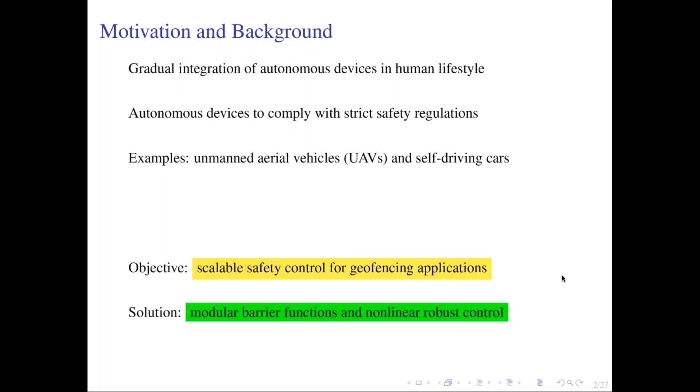So the geofence basically represents a virtual net, a set of distinct points. We have a set of distinct points, and we want to maintain the movement of the vehicle inside the given set. And this becomes our operational environment.

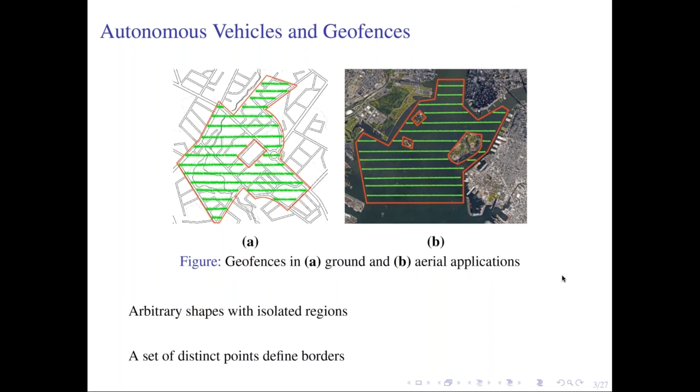So regarding the state of the art in safety design, there have been many different methodologies, especially for UAVs, because we are dealing with an intrinsically unstable system. Also, the UAVs are underactuated, so creating a safe trajectory is not an easy task. For example, you cannot just use the position or velocity information to maintain the vehicle inside the geofence - that becomes a tedious task. That's why many people have opted to enforce safety regulation at the control level.

Popular methods that have been around since the 1970s, early 70s, include, for example, barrier functions, which is a rather recent methodology, potential fields, and dynamic programming methodologies. For example, you have MPC, model predictive control, quadratic programming, and nonlinear programming.

This all falls into this category, including dynamic programming. And another domain is basically machine learning, including artificial intelligence and other computationally intensive methodologies.

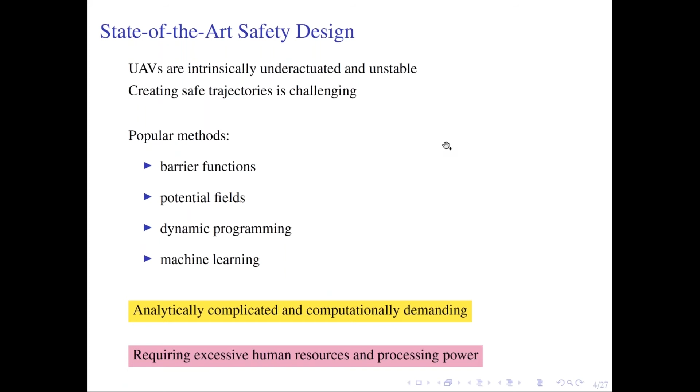So what are the issues with these methodologies? One is that they are analytically complicated. For example, with potential fields, if you have a number of obstacles, or an arbitrary shape geofence, it becomes quite tedious to create the control. And also they are computationally demanding, requiring excessive human resources and processing power.

So to move ahead with our research, we selected barrier functions. They have some nice features embedded into them. For example, you can use barrier functions in conjunction with Lyapunov functions to assure both safety and stability. That's why we selected to work with barrier functions.

Having said that, there are some limitations to barrier functions. For example, if you have a given environment with a number of obstacles, you have to model the obstacles, your barriers, everything, the boundary of your geofence, as a control barrier function. The control barrier function, loosely speaking, has some similarities with Lyapunov functions. For those familiar with Lyapunov functions, you know how difficult it is to obtain one for a specific application.

That becomes a little involved when dealing with a highly nonlinear system such as a UAV. On top of that, the structure of the control is heavily enforced by the control barrier function, meaning we have low scalability. Depending on the number of obstacles and the shape of the geofence, you end up with a different control structure, which means you have to modify this every time you encounter a new environment.

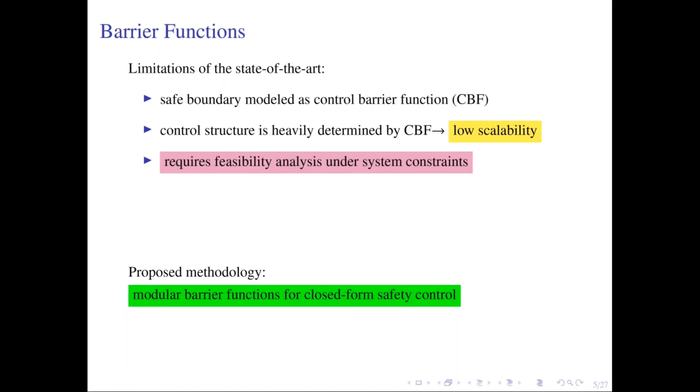So first, let's talk about safety feasibility under control saturation. For this, let's focus on a double integrator system. For example, we can model motion along a translational or rotational axis using a double integrator, which is why it's very useful to analyze its behavior.

So let's say we have a double integrator, and the input, which represents the acceleration, is limited because with any vehicle we have a limited amount of acceleration and deceleration. That's why we've limited the control between minus mu and mu.

Now the safety requirement asks us to maintain the motion of the system such that h(x, v) always stay less than 0. Let's say in this case we are interested in maintaining the position always negative. So we start with an initial condition with a negative position, and we want to see what control signal is required to maintain the motion inside the safe set, meaning we want to maintain the position always negative.

If you look at the figure here, if you select an initial condition in the shaded green area, that means with the limited control actuation we have, we cannot maintain the motion inside the safe region, we cannot satisfy the safety requirement. That's because of the limited control actuation we have, since if you're in the shaded green area, you need a braking power more than mu to maintain the motion in the negative range. That's why we're dealing with a feasibility condition here.

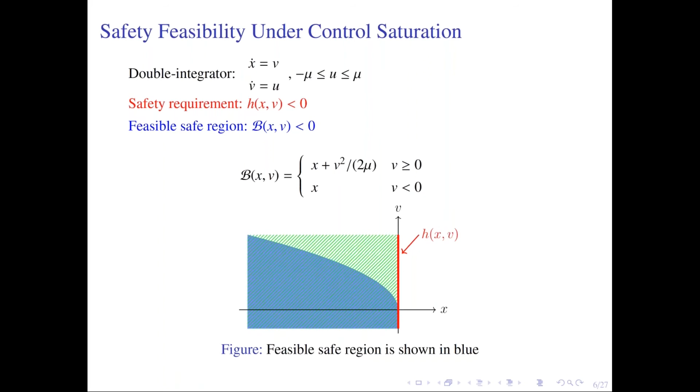So if you do the math, you end up with this feasible safety region, shown in blue here, with the equations given. Any initial condition you pick inside the blue region, regardless of location, with the limited amount of control we have, will result in motion that is always inside this feasible safe region. So we take this and use it to build up our algorithm.

So what are the goals and contributions in this work? First of all, as I explained earlier, we want to enforce a safe fly zone on a UAV, and we have constraints on the system, including input saturation.

We have under-actuated dynamics, and the equations of the system are highly nonlinear. On top of that, we have low-rate position measurement. For example, indoor applications using motion capture cameras don't provide fast update measurements of position, it's at the rate of 100 hertz. For outdoor applications using GPS or other measurement units, they have similar limitations, and the precision you can get from these devices vastly differs.

So what we propose here, our methodology is based on a modular barrier function. What we do is basically incorporate the actuator saturation inside the modular barrier function.

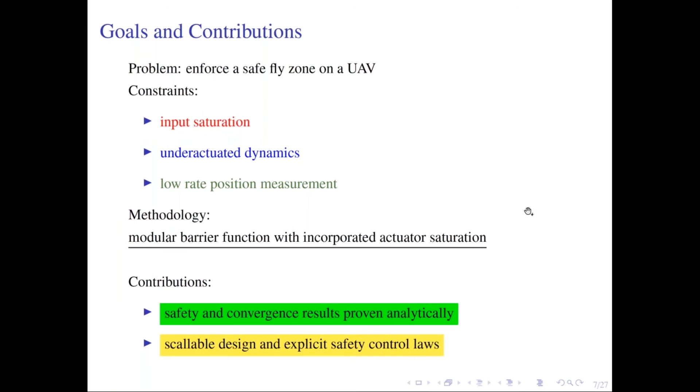The contributions that we have made here are twofold. First, we have proven the safety and convergence results analytically, so these results hold for any sort of quadrotor, and they can also be extended to ground vehicles. The design is also scalable, and we have explicit safety control laws, meaning the implementation of the control here is quite easy, and it conserves the amount of processing power available to us.

So there are some basic properties associated with a quadrotor. The attitude, the rotational angles, and the thrust can be used to control the translational motion. That's one observation through the dynamics of the unmanned aerial vehicle. The other thing is we can decouple the attitude and translational dynamics quite effectively. With this, you can use a two-layer feedback linearization to decouple the entire equations of your system into 6 double integrators, 3 for translational motion and 3 for rotational motion. As I explained, the rotational motion is used to control the translational motion. So we use this property to our advantage.

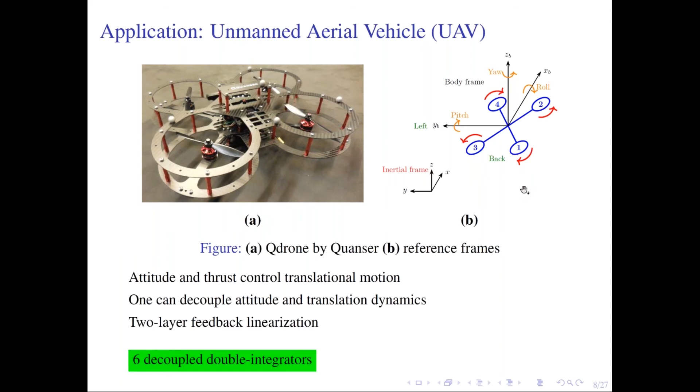Now that we have a bunch of double integrators, we go back to the double integrator. The problem statement is designed around solving the safety control for a double integrator. Consider the double integrator, again we have input saturation, and the design requirement is to obtain safe limits on the control signal such that the position always is negative for all feasible initial conditions. So here, what we do is incorporate control saturation into our safety barrier.

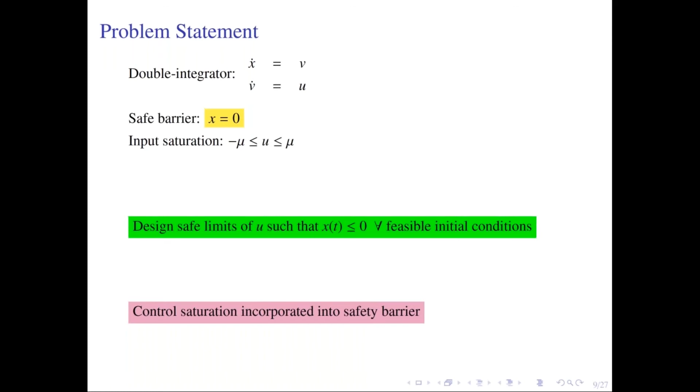But now we have another problem. If we arrive on the barrier function at the border of our safe set, we do not stop at the origin. So what's the next step? We have to modify this barrier function to achieve stability, meaning that if we arrive on the barrier, we want to make sure the system stops at the origin.

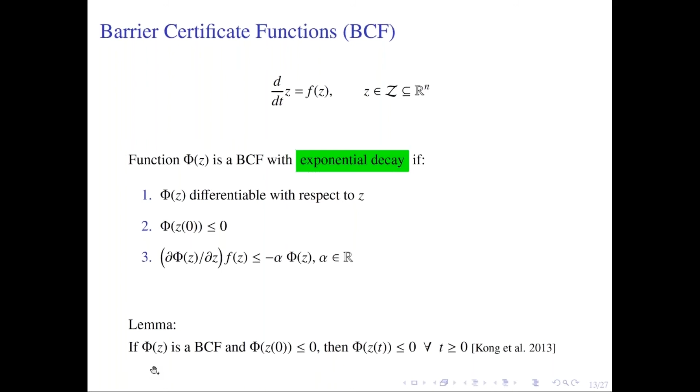This is basically very useful because we have already figured out a barrier function, and it turns out that the barrier function that we have already figured out is actually a barrier certificate function which satisfies all of these properties. Now, because we have these properties, we can use this lemma to derive our safety results.

So now with this information, we want to see what is the control law that maintains the safety of the system for all the initial conditions inside the safe set. We have shown that if you have an initial condition selected inside the safe set, and the parameters we have - gamma is positive, obviously less than mu, alpha positive, rho positive -

if you have the control command less than US, which is given in this closed form expression here, then the set omega is forward invariant for all t. That means any motion that starts inside the safe set remains inside the safe set forever.

Also, above that, you can also prove that the command, the US, the limit that we have, is always larger than minus mu. This is very useful when we basically go to the next step.

So the next step, basically, what is with this result? So we have a safety verification result. We can say that if the control command is less than this limit, then we are safe. So now how can we use this, for basically a trajectory tracking application, for example?

So let's say you have a control, as you see here, which basically is designed to track a reference trajectory XR. With this, the green box that you see here shows the control command. If you implement this control command, you can assure that you always have safety.

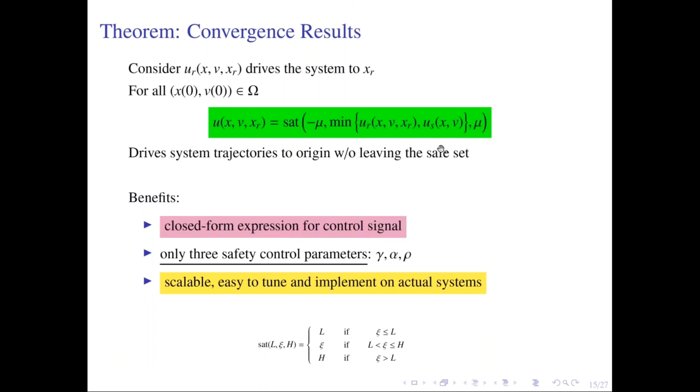And on top of that, we have a scalable design here. We have the closed form solution, and we have the limited parameters, which makes the design very scalable, easy to tune and implement on an actual system.

So this was the base module for our entire design. We have shown that we have a closed loop, closed form control that guarantees both tracking and safety at the same time. So now let's use this to create more complicated scenarios.

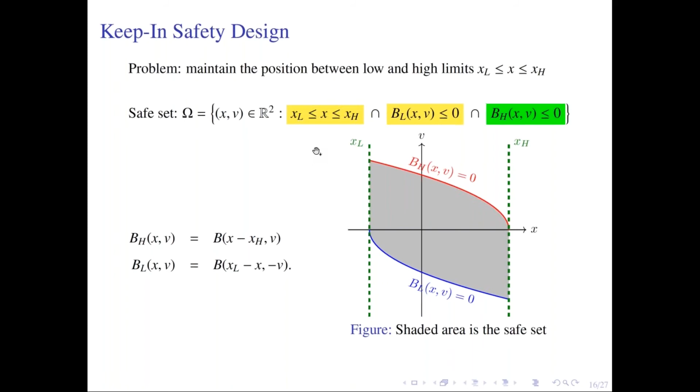So BHBL, again, you can find the expressions for this red and blue curves using the barrier certificate function that we found in the earlier step. So now with this configuration...

This is the final shape of the control that we come across. Basically, if you look at this yellow box here, you have two saturations nested here. One is the outer saturation, which represents the actuator saturation. That's there—you cannot do anything about it, because the actuator is providing a limited command. So we have the outer saturation function representing the actuator, and the inner saturation function, which represents the safety law here.

So for the safety law, we have UL and UH. UL represents the low limit, and UH represents the high limit. And again, we have closed form solutions for UL and UH. In the most inner part of this equation, we have the reference tracking.

So the reference tracking, as you see here, we did not limit the structure of the reference tracking, the trajectory tracking algorithm—it could be anything. That's the beauty of this design. Basically, you can have any reference tracking algorithm, and you can augment this provided safety law into your design without worrying about changing your trajectory tracking algorithm.

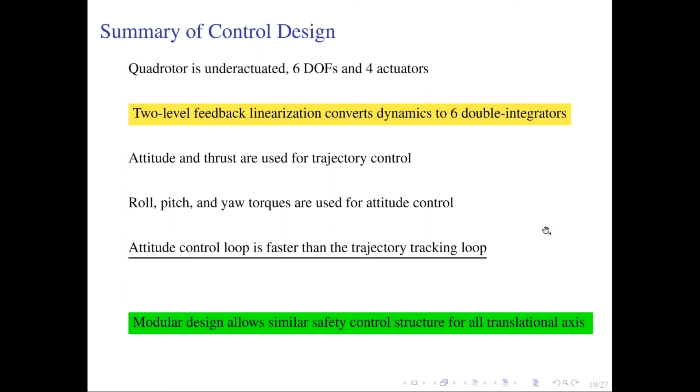So at the desired level, if you have it controlled at the desired level, it means that you have a desirable translational motion. So our proposed design, which is a modular design, allows us to use the similar safety control structure for all the translational axes. That's very important. If you have one control design for one of your translational axes, you can just copy paste to the other axis to get the performance that you desire.

So that means, it's true that we use the super twisting algorithm here, but you can use any other methodology to design your trajectory tracking or attitude control. As a matter of fact, we did this in our lab. We used, for example, PID design. We also used integral sliding mode control, and we also implemented a super twisting algorithm. So all of these designs basically do not change the structure of the safety control.

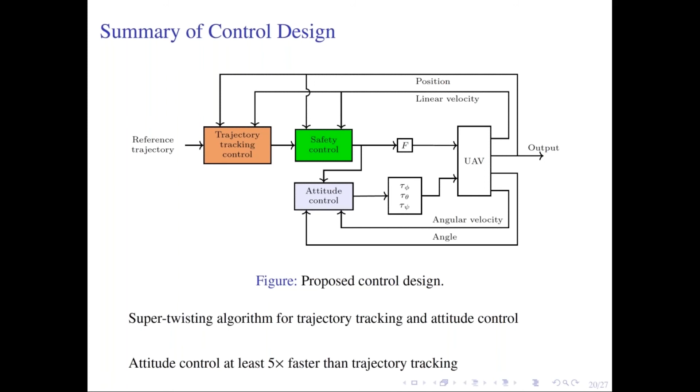So again, to get the desirable performance out of our system, we set the attitude control 5 times faster than the trajectory tracking algorithm. Basically, the inner loop has to be at least 5 times faster than the outer loop.

Please pay attention: in some cases, for example when dealing with micro UAVs, some people just do the calculation in the ground control station and transfer the commands via Wi-Fi to the quadrotor. But here, everything is done on board the quadrotor. So the ground control station is merely there to collect data from the system and to modify the control algorithm.

So as I said, this is a real-time implementation. The control loop runs at 1,000 hertz, and the motion capture, as I also explained earlier, runs at 100 hertz — basically that is the highest rate at which you can update the position information. Also, we have onboard IMUs, and we use the combination of the motion capture and onboard IMUs through a complementary filter, a set of complementary filters provided by Quanser, to get the position and rotation motion information from our system.

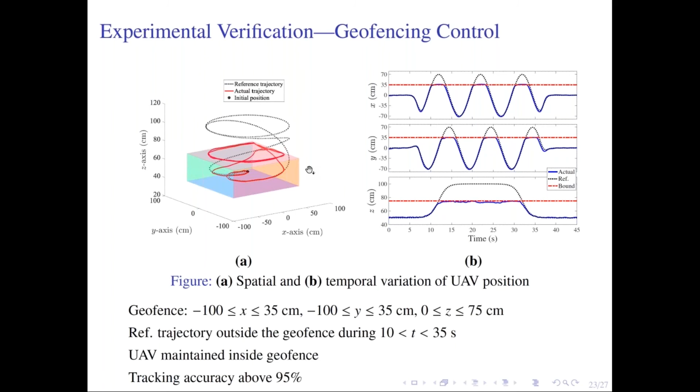On top of that, we have a tracking accuracy above 95%. That's quite good, actually, if you compare it with any other trajectory tracking algorithm. This is very good - we have above 95% accuracy.

Similar to the previous case, if you look at figure A here, in the situations where you have the reference outside of the geofence, you see the provided safety basically crops the acceleration along the translational axis to maintain the motion inside the geofence.

So to conclude our talk here, we provided an expression for a feasible safety barrier incorporating input saturation. It also incorporates convergence to the origin.

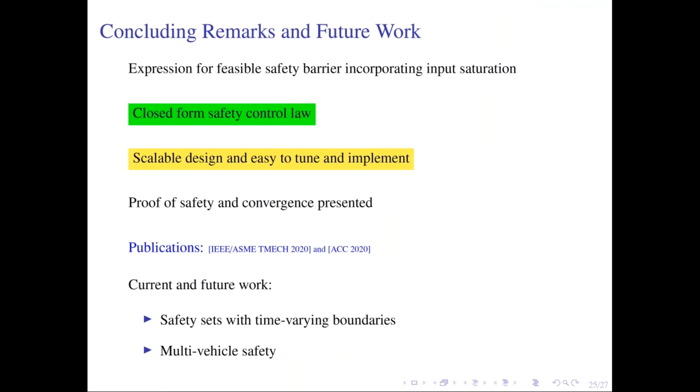So Dr. Ghaffari, on slide 8, does the two-level feedback linearization for the quadrotor involve an inner loop and outer loop for translational and attitude control? Yes, that's correct. We have an inner loop for the rotational motion and an outer loop for the translational motion. That's what I explained further in this slide when I talked about the super twisting algorithm. The same design has been used for rotational motion and for translational motion. This is the structure of our design that you see here. The inner loop represents the attitude control, and the outer loop represents the trajectory tracking control.

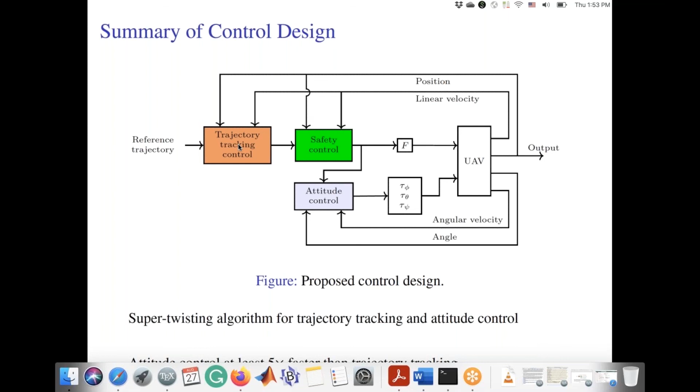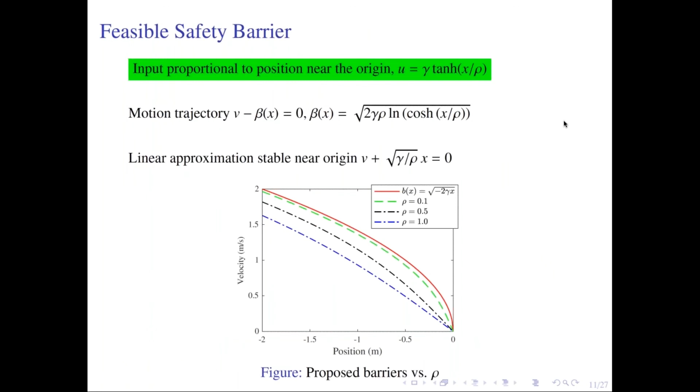Amazing. The next question is about slide number 9. It is mentioned that a feasible initial condition is required for the methodology to work well. Could you give an example of an infeasible initial condition? Let me find slide 9 here. If you look at slide 10, for example, one infeasible initial condition, or actually any initial condition that goes above this red curve that you see here, becomes infeasible because you don't have enough control command to bring the system back into the safe zone. So any initial condition above this dashed red line is considered unsafe.

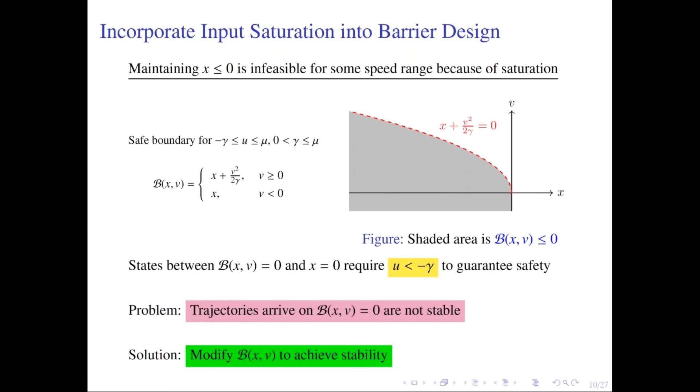How do you overcome or test the conservatism of the robust control design? This is another good question. The conservative design you're dealing with is mostly related to the unknown factors involved in the system. If you look back at the super twisting algorithm for the second order system, there is a factor delta that includes the uncertainties and unknown dynamics, which is bounded by M. If you have a very conservative approximation of M, that affects the whole design.

One way to alleviate this issue is to use an adaptive version of this design, or replace it to estimate the upper limit of delta as you go. Another way is to conduct an empirical analysis of your system to see what limits you get on M for each axis, so that you can accommodate it.

I think the easiest method is opting for an adaptive design. For example, some people have used backstepping, which is very efficient and useful, with good results. The caveat with backstepping, or any adaptive version of these designs, is that you risk adding complexity to your design. So you have to consider where you're standing - if that's something you can afford, yes, by all means you can use an adaptive version, such as backstepping, which has also been proven very effective.

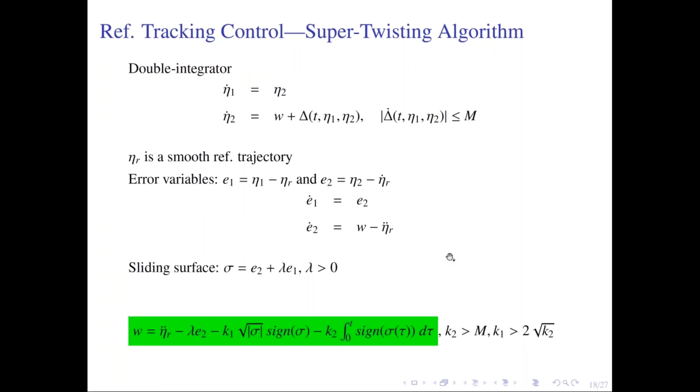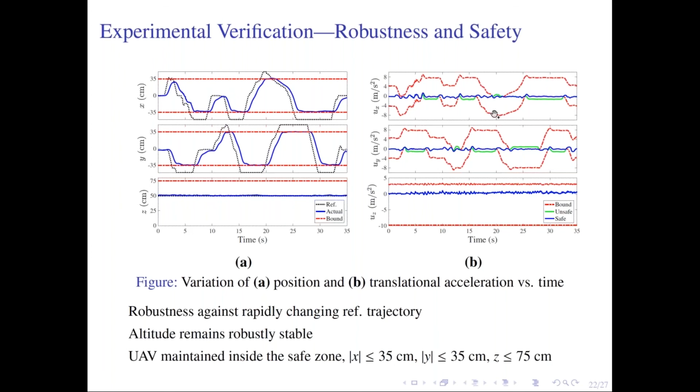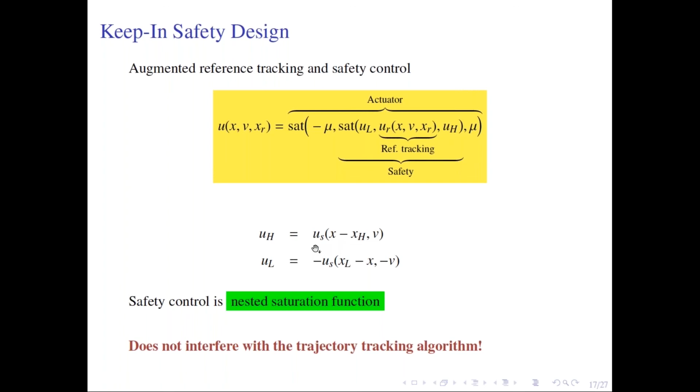The way we obtain these limits is through the nested saturation function provided here. If you look at this big yellow box, you see UL and UH. UL and UH have this relationship US, which we provided in this slide. This is how we get the upper limits on the acceleration, all done using this safety control design.